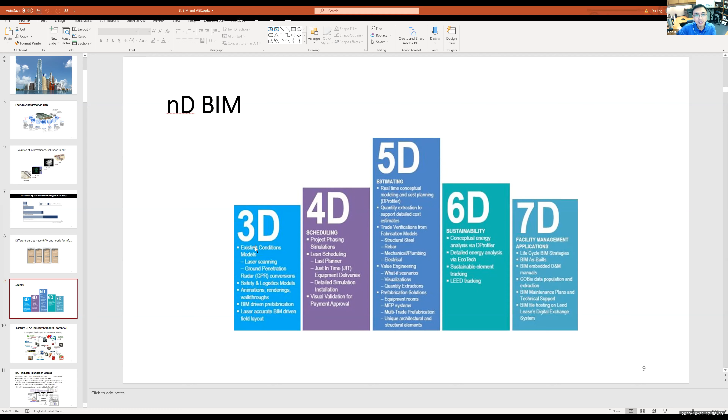And also, I think you guys are working on the 4D simulation project. And later on, we will also cover 5D. So that's just how the industry defines everything. And then we talked about BIM being more than just a modeling approach. It's more of a management tool. It's more about a change to the existing process.

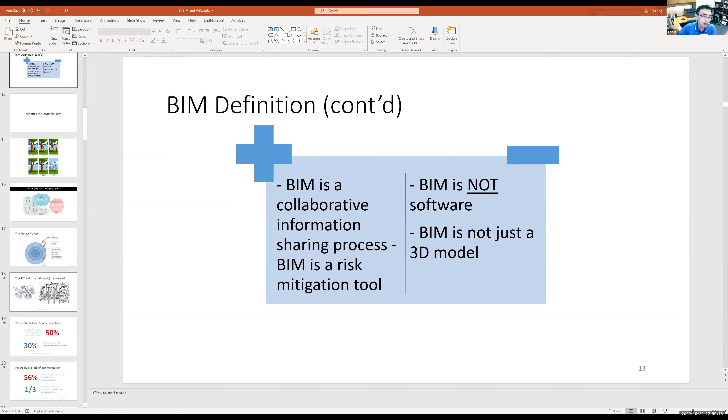And if you recall, we actually played a game two weeks ago to show how difficult it is to exchange information among different parties in a project. Even inside the same company, the needs for information are so different. And the reason is our industry is very interesting. We don't have this so-called vertical integration, from the beginning of design to the construction to the facility management. We don't have one company doing everything.

So we have to bring different companies to the same project, forming what we call a temporary organization, and then people will be dismissed. So it's very difficult for us to build a long-lasting relationship or establish the procedure for this kind of information exchange. And that's probably why most problems are rooted in this lack of communication, the lack of integration. And NIST actually reported more than $15 billion loss due to such lack of interoperability.

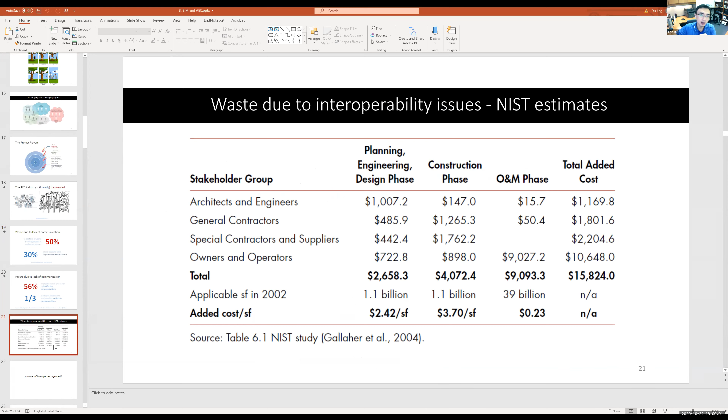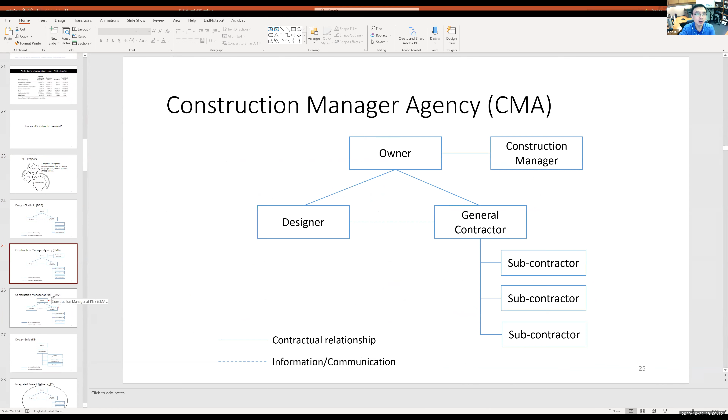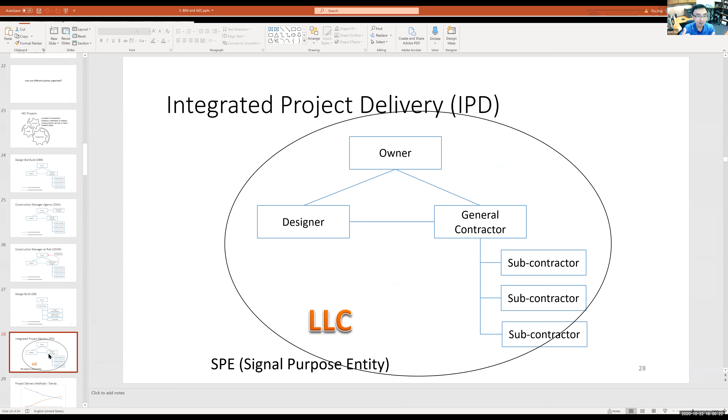So that's why the industry has been trying so hard to bring people together via contractual relationships. We start to see the project delivery method change from the traditional design-bid-build method that separates everybody to the latest integrated project delivery, or IPD. And BIM is the technical way of doing that. If we have this centralized cloud space that stores all the information, then it's possible for us to share the common vision.

Okay, so this is something that I want to continue: why this integration is really needed in the construction industry. First of all, you have to understand there are so many construction companies in the US. This is the latest data I can find. If you guys can find newer data, please don't hesitate to let me know. Please send me an email.

So in 2008, there were more than 770,000 construction companies in the US, but 91% of them only had 20 workers or less. Only 1% of construction companies in the United States had 100 workers or more. So the average was only 9 people per firm. So you have to imagine, there are so many small-sized construction companies in the country.

I really like the metaphor of boiling water to describe the construction industry. We have a lot of small bubbles, and these bubbles disappear very fast. So construction is a very risky business. According to the BLS, the Bureau of Labor Statistics, about two-thirds of construction companies run out of business after 6 years.

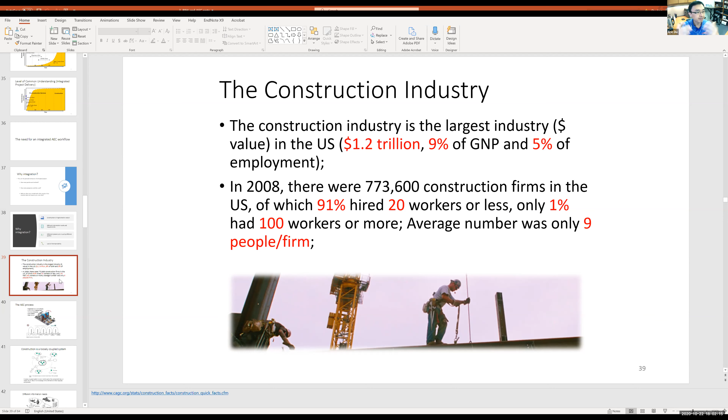Okay, so fundamentally speaking, we are lacking the ability to grow and to integrate efforts. So people tend to use the word fragmented to describe the AEC industry. We have these invisible walls between different disciplines and also different phases, from the owner to the architects to the engineers, to the builders, and finally to the users of the building.

Sometimes the users are different than the owners of a project. And it's very difficult for us to share that information. And like I said earlier, a project is considered a temporary organization, or what people call a loosely coupled system. They are coupled because in order to finish a project, we have to bring different parties together, like designers, engineers, builders, but they're only loosely coupled, which means after 6 months, after a year, the project duration, they will basically move away.

They will walk away and form this kind of new temporary organizations with other companies on a new project. So think about that. It's very difficult for you guys to make friends, to have this really good procedure. And also, since we are working towards our own interest and our own focus, people tend to perceive information in different ways.

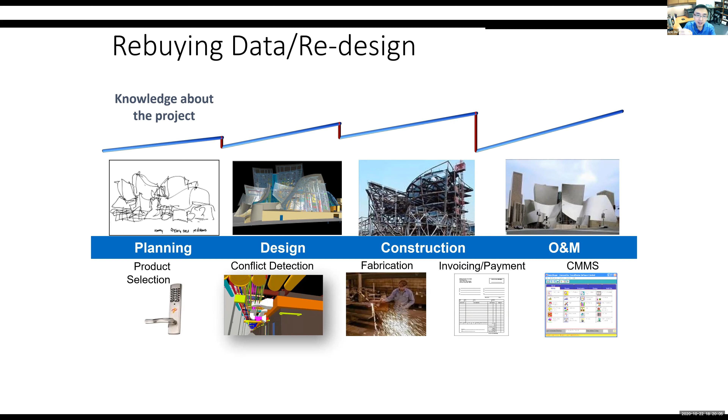That's ridiculous. The Air Force paid a design company to design something, and after 3-4 years, they hire another facility management company to maintain the building. And there's no way for the facility management company to get the 3D model from that design company. Then the facility management company will charge the Air Force about $0.25 per square foot to rebuild the data. That means every 3-4 years, we're wasting taxpayers' money at around $150 million. That's the problem we are facing altogether.

So I hope you guys now have a good sense of the issues we have in the industry and why building information modeling has become a hot keyword recently. It's not about the fancy 3D model you see on a computer screen that you can rotate. No, it's more about integration. We see the hope to solve the most fundamental problems: vertical integration, horizontal integration, different interests in data, information sharing issues, liability issues.

We see the hope to solve those problems and totally transform the nature of the AEC industry. That's why BIM is important. Okay, so I hope you guys get a sense.

And then talking about that, what is the number one step the industry took to do that technical-wise? Like I mentioned, contractual-wise or management-wise, people are using these new project delivery methods to solve the problems we are seeing. But from a technical perspective, we are using something related to BIM to solve the problem. So this is something called the Industry Foundation Classes.

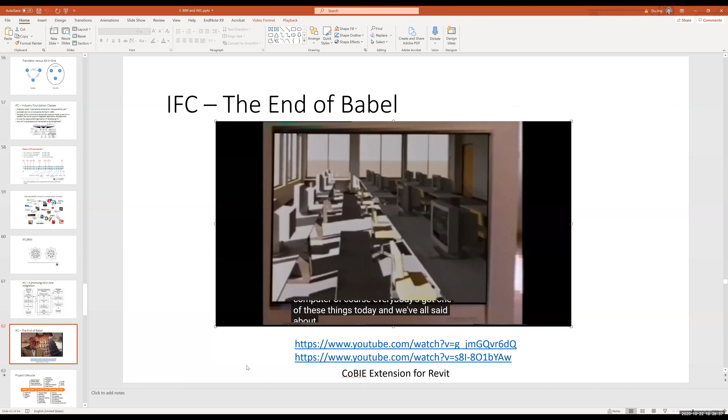But not too long ago, thanks to technology, there came along an amazing invention that actually made this problem worse. What is it? The desktop computer, of course. Everybody's got one of these things today, and we've all set about busily automating every task we can think of. On a project like this one, for example, the designers have automated their drawing production, and the structural engineers have automated their calculations for determining the size of members, and the HVAC people have automated their calculation for thermal performance. But they're still not really communicating.

You see, we haven't improved the processes that connect these tasks together. And that's because the software packages that make this computer do its job are made by hundreds of different companies. And each software program has its own way of defining terms for the computer to understand. So they all talk to the computer, but they don't talk to each other, which means the people who use them can't do a very good job of talking to one another either, at least not with their data files and electronic drawings and documents.

And why is that a problem? Well, on a big project like this office building, for example, our fractured information system, this one we're all using, results in information that's often incompatible, inconsistent, or redundant. You can imagine what something like that adds to the cost of something like this. When you come right down to it, we're all wasting a lot of time.

For example, an architect does an initial design and passes it off to the structural and HVAC engineers. Now they all work in parallel, isolated, making changes as they see fit. When they get back together to try to integrate all of their decisions, well, the results are something of a mess. It takes iteration after iteration to finally get it right.

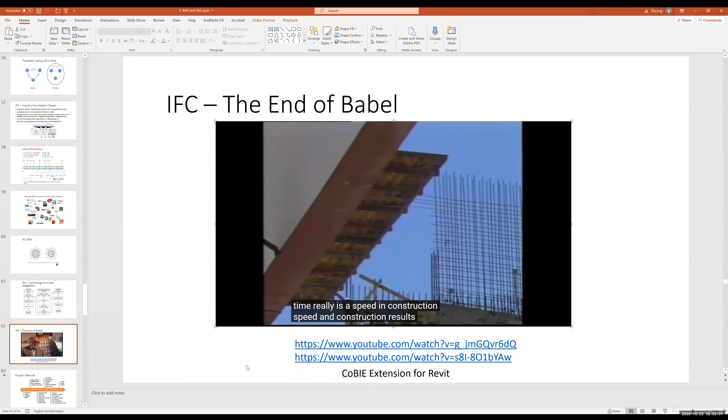The biggest advantage that I see of this alliance over a longer period of time really is speed in construction. Speed in construction results in lower expenditures for owners, users, and also an opportunity for an industry to work together where it has not tied that well together in the past.

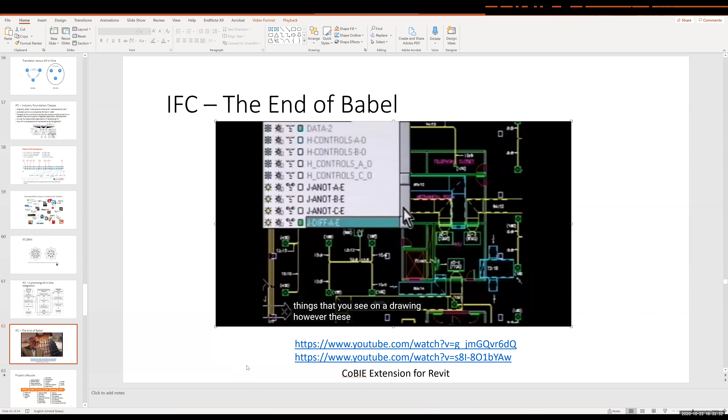We will now, with the interoperability solutions with the foundation classes, be able to look at objects in a drawing. The drawing will become the beginning of a database, if you will, of objects. Those objects relate to doors, windows, walls, those types of things that you see in a drawing. However, these objects will be interoperable. Once the definition is set, other disciplines will be able to use those objects.

Standard objects that can be interlinked across the various disciplines in the construction industry is a tremendous advantage for customers. I think probably the value added to my customers and everybody's customers is essentially reduction in building the structure and some cost advantages in what it costs. And I think perhaps even the more important value to a customer is what I call life cycle costs.

The idea is to have industry-wide definitions for every object we use to design, construct, and maintain buildings, and then to create industry-standard definitions for the relationships between these objects. So when I create a door with my design software, your facilities management software automatically recognizes that it is a door. Plus, that door will have accumulated all the information defined about it as it was worked on by architects, engineers, specifiers, estimators, and builders.

A truly intelligent business model. The data loss and confusion you've come to expect from translations and interpretations, that's all gone. What we're really talking about is interoperability, making things work together no matter who creates them, no matter who's involved.

Now, if the success of this interoperability depends on agreement about terms and relationships, well, then it seems that getting the definitions right is critical. So who's going to create them? You are.

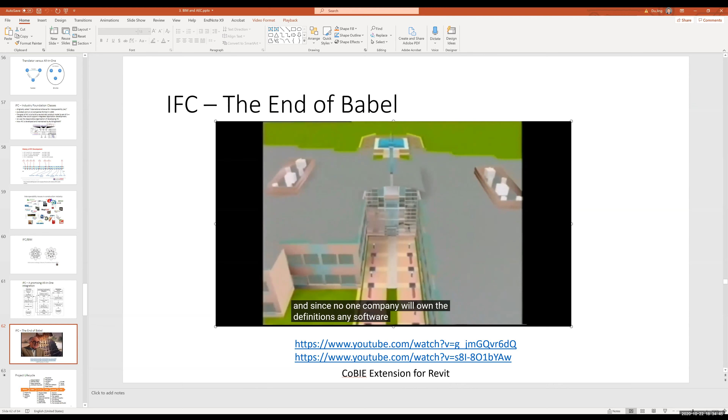Autodesk is working with its industrial partners to develop these definitions with the people who actually work in the architecture, engineering, and construction industries. The definitions will result from analysis done with today's top companies, large and small. And since no one company will own the definitions, any software company can use them to develop their products, which means you get freedom to choose. You see, that's what interoperability really means to you. It's all the benefits of integration, but with the liberty to handpick any application from any vendor you want.

The definitions will be called Industry Foundation Classes, a terminology which may not mean much to you unless you're a computer programmer, but it's going to change the way you work.

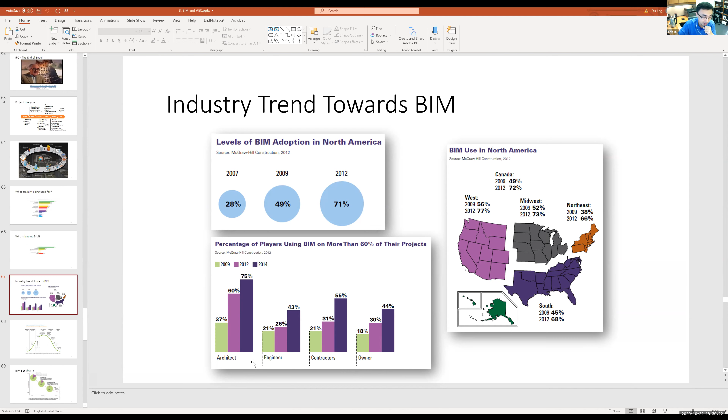This study also surveyed more than 400 projects, total value more than $559 million, and they started to see the benefits of BIM. For projects using only 2D drawings, the change order is about 18% of the contract value. If projects were using 3D standalone BIM, like I'm using Revit, you're using Revit, but we're not exchanging data, the change order reduces from 18% to about 11%. But if we use some kind of collaborative BIM, such as cloud BIM or the Assemble system we'll be learning soon, the change order number reduces to just 2.7%.

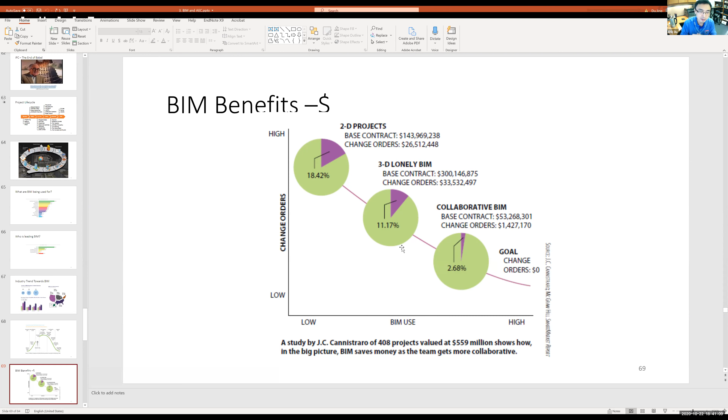Change order is something we cannot avoid or hardly avoid in a project, but if we can reduce that, it means a big money saver, saving efforts and money for different parties. So talking about BIM adoption in different regions, US and North America is really taking the lead. This is also data from 2013. At that time, we start to see some companies already using BIM for around 6 to 10 years. 8% of companies already used BIM for more than 11 years. The majority of companies actually used BIM for more than 3 years. So the US is really taking the lead in terms of BIM adoption.

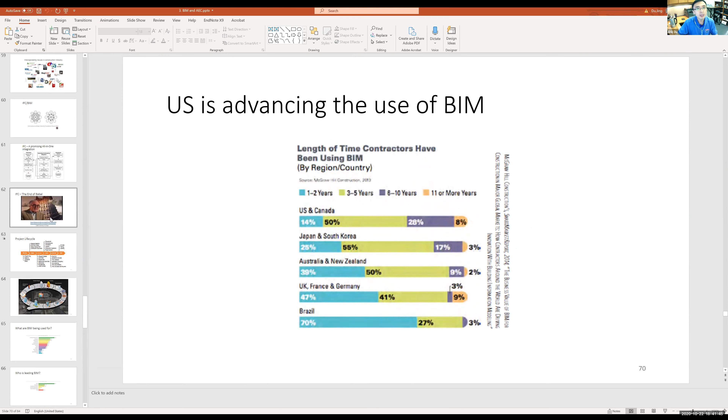Planning happens more for the owner. For example, they need to do programming, kind of like, hey, I want to build an additional office building for my company, and I start this program. Then you start to do some feasibility study, such as financial feasibility and construction feasibility. Then you would hire a design company to do some conceptual design. The conceptual design only cares about the general size, the space needs, nothing related to material, nothing related to final design, but more about the concepts.

So that's called planning, okay? After the planning, you have a signed agreement inside, kind of like the CEO from the company will approve your plan. Now, you as the owner will look for a designer, like an architect company.

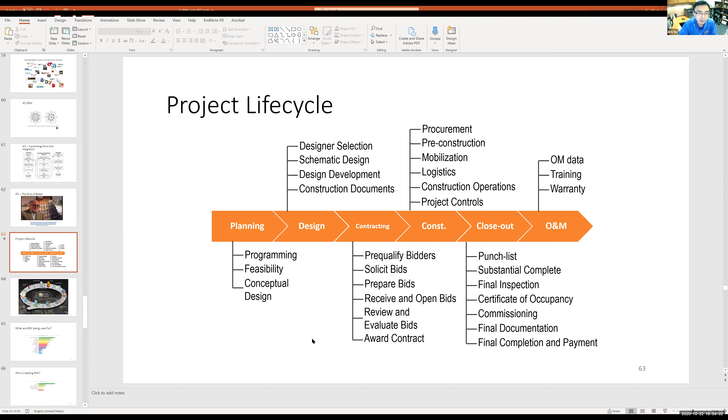Design, I guess yes. Programming, people are using SketchUp to do this initial conceptual design all the time. So pretty much BIM can be used everywhere and anytime, okay? From programming to conceptual design to detailed design, we are using Revit. Conceptual design, people are using SketchUp all the time. For analysis, we use robot structural analysis, the finite element analysis, to generate the documentation, construction documents for the building, to fabrication.

So like we issue the shop drawing models, we send them to the computer so the computer can prepare the components, especially the structural steel structures, automatically. And of course, general contractors can use BIM to perform clash detection and also 4D simulation and 5D estimating.

Construction logistics: like you guys see in Synchro, they can simulate the tower crane moving, traffic. They can simulate how the building is built up, so that you have a better sense of how you should lay out your storage, staging area, and how you should coordinate the efforts.

Operations and maintenance: we can integrate the equipment information, the supplier information. We can integrate the lead information into that. Even for renovation and demolition, people are talking about the use of BIM for them. So BIM actually is very promising to facilitate all the phases in the AEC process. Okay, so with that said, what is the most important one we should know?

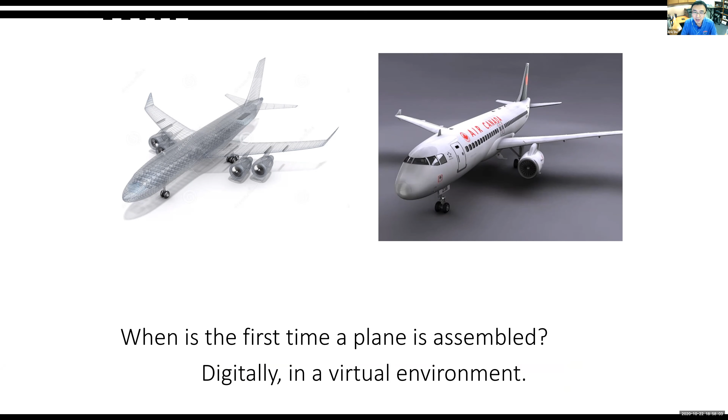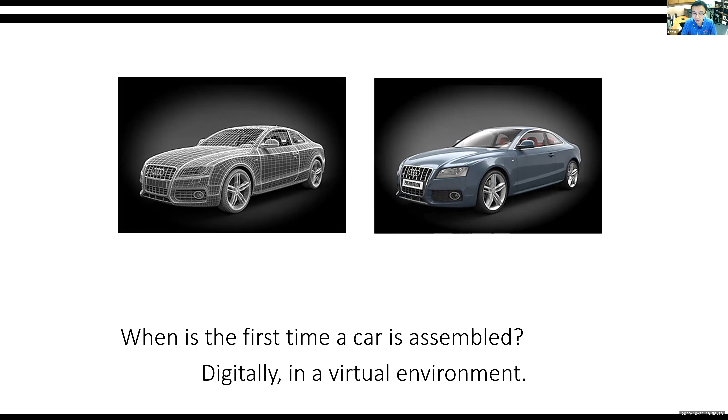Of course, digitally, right? You see models all the time; people design different airplanes, and they also run simulations to see how the wings and engines come together and how they should move them in the factory to put them together. So when is the first time a plane is assembled? Definitely digitally in a virtual environment. When is the first time a car is assembled? Of course, digitally. But when is the first time a building is assembled? Most times in the field.

So people do have the mentality in the AEC industry: let's get our hands dirty. We have this design, perfect. Let's do the job. Let's stop talking. That's the mentality most construction guys have. Unfortunately, that is not the best practice.

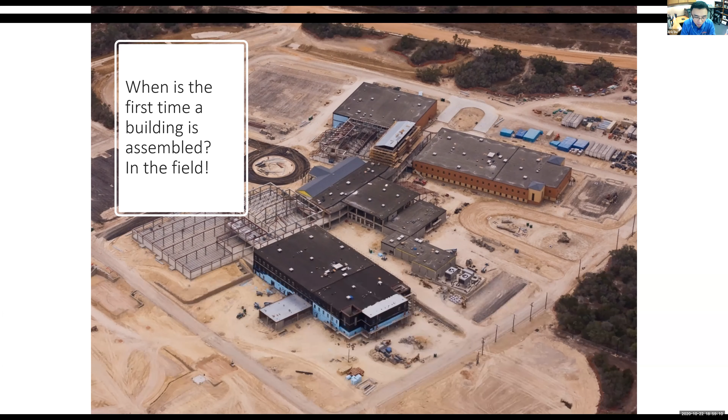Why don't we do the assembly of this building virtually, like playing a video game, doing the Synchro simulation: I'm going to do the earth moving there, meantime move some concrete here. No, that's not working, let's change the plan. Now I'm doing this heavy lifting with the tower crane. Unfortunately, somebody's doing the curtain wall there. Not working. Why don't we do that digitally first before moving to the job site? That is why pre-construction service is important.

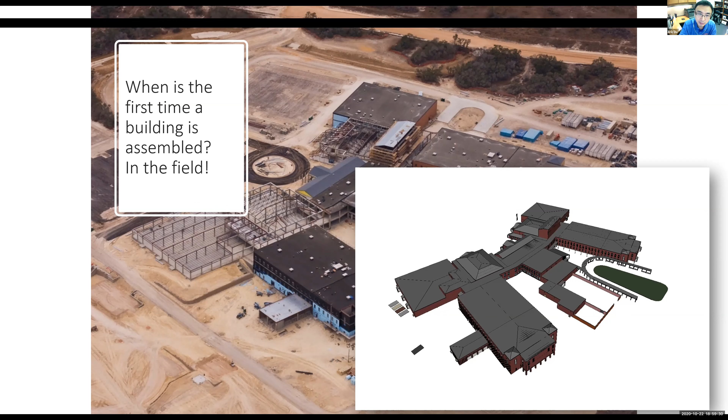So you can imagine pre-construction service is to assemble a building virtually, digitally, to understand the process and resolve all the potential issues before you do the earth moving. That is called pre-construction. That's why it's important. Pre-construction, or pre-con, is used in planning a construction project before the actual construction begins. It is critical to a project's success.

The pre-con phase is a summation of the planning services rendered before a project begins, including estimating, scheduling, risk assessment, for example the unknown site condition, potential traffic, shortage of supply, shortage of laborers, potential hazards, and maybe the height of a pandemic, okay? Value engineering. What is value engineering? Anybody?

The cost? Yes, value engineering means, can we change to a cheaper material? Can we change to cheaper construction methods without affecting the scope or the function of a project? It is a term and a method invented in World War II when the US participated in the European wars. There was a significant shortage of materials in the US. So two mechanical engineers, I forgot their names, developed this concept called value engineering.

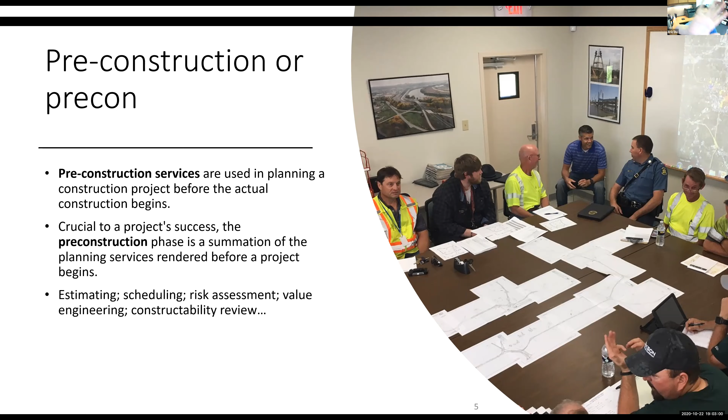So you sit down with different trades, with different subcontractors. You are doing this brainstorming exercise virtually, digitally, before you actually do the hands-on work. This is called pre-construction, and it's becoming more and more popular today. So let's change the mentality. We are definitely handy, we do a lot of dirty-hands work. That's a really good attitude, but let's do it in a smarter way, which is pre-construction. So next week, we are going to keep talking about how BIM can be used to benefit pre-construction.